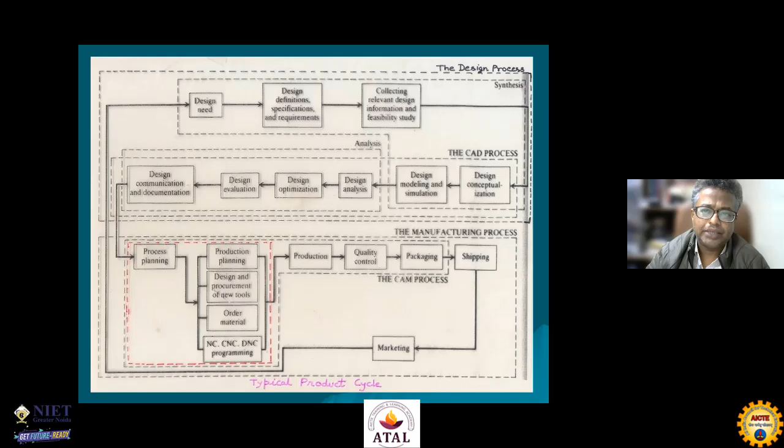So it was known as rapid prototyping because in this slide you can see this design process. It's a typical product design cycle. There are a variety of steps, starting from design need, and then you actually do the design of a product, do the analysis, do the optimization, and then finally once your design is optimized, you go for the evaluation of the design.

Evaluation of the design means you have to make your design and test it, because before really testing the design you cannot go for the production. So this particular step, design evaluation, is a very critical step.

Why is it a critical step? Because your product is new, the geometry may be complex, the materials may be complex, they may be stringent materials. So making the components and making the complete product may take a lot of time because there's no previous expertise available.

After that, once your design testing is successful, then you go for blueprint making of the design, that is the design documentation. And after that, before starting production, we go for planning of the production, that is process planning, production planning, design and procurement of new tools, ordering new material.

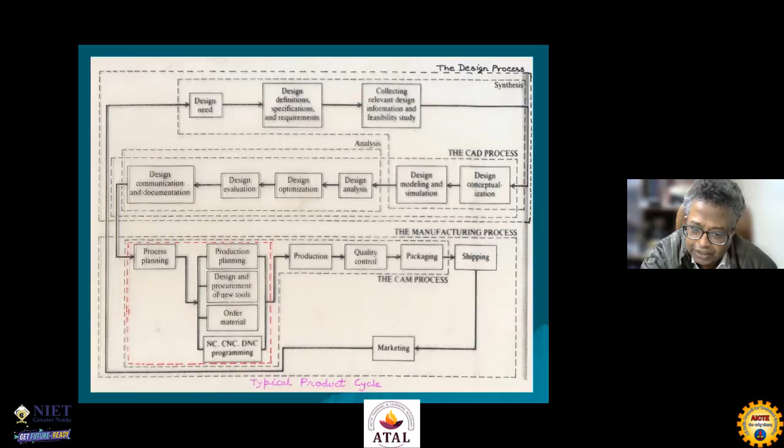So once the product is in the market, you again get feedback from your customers and you can modify your design needs. That's how this design process is a continuous process. It never ends, and the typical product design cycle has been shown in this particular figure.

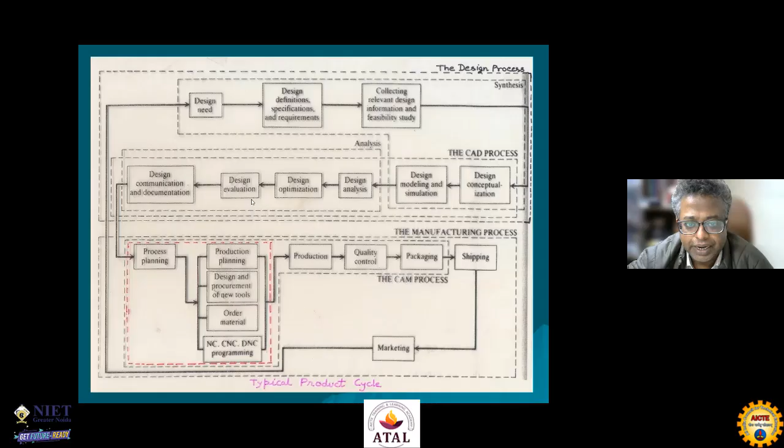So in the beginning, as I indicated, this prototyping used to be the product design function, and the focus or emphasis was on this design evaluation. This prototyping is nothing but making first few replicas or models of a particular product design, and it helps in conceptualization of a design before the start of full production. A prototype is usually fabricated and tested.

Earlier what people used to do was a long time taking activity. That's a bottleneck actually, because the entire activity used to be in the hands of people, and they are craftsmen basically, skilled craftsmen or skilled engineers, or diploma holders, and they used to do this activity. Because they were less in number, they used to be in high demand, and this activity used to take a long time.

So that's why people tried that, okay, why not develop prototypes, and we should try to do soft prototyping. Instead of actually doing the prototyping, we can try to test the component or the product virtually. That is said to be soft prototyping. So the model can be stressed in a virtual environment and simulated. That was a good activity, but it was not so good because there were many assumptions involved when you are actually solving a problem using software.

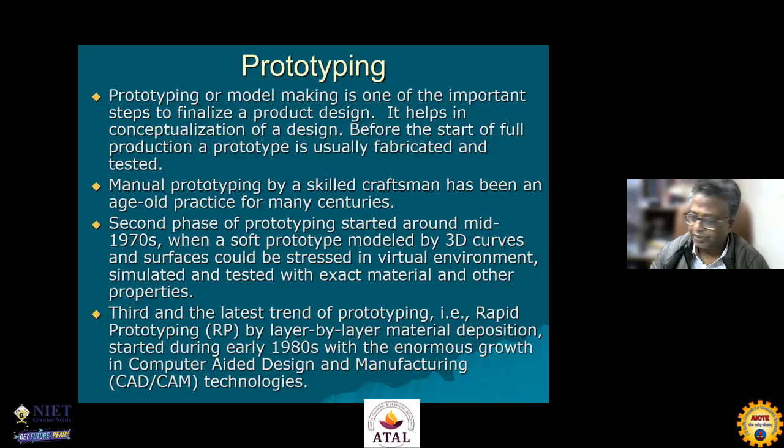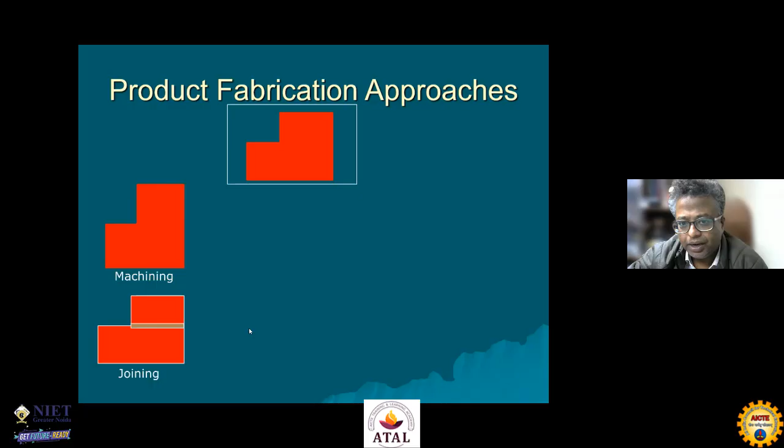Now let me explain the principle. Suppose you want to make a product like this. If you want to make a product like this, you are definitely going to do machining, that may be one approach. The second approach may be that you can join, and the third approach may be that you can take a bulk of material and deform it.

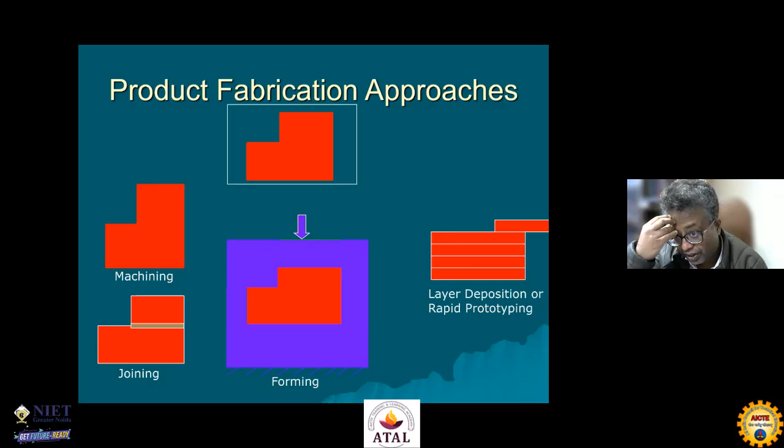But in rapid prototyping, what do we do? It is a bottom up approach. Bottom up approach means we try to deposit material layer by layer from bottom to the top, and we actually make the component. So this is the concept of prototyping.

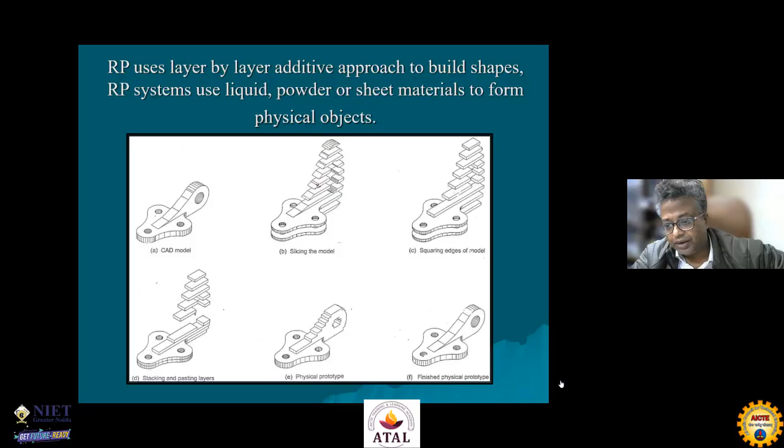So in order to make this more practical and give a better idea, the idea is that we start with CAD modeling. Whatever you want to make, whatever you want to produce, the first thing would be that you will make a model of it, correct? So you'll make a CAD model of it, and then you will slice the model, and after slicing the model, suppose you cut these kind of layers.

Suppose you take some thick paper or maybe a sheet, cut it like this, and stack these layers one over another. So basically you're going to get a physical prototype like this. If you compare the two, you'll find that the surfaces are not matching, correct? There's a stair-stepping effect because of the finite layer thickness.

Here you can have a look that the geometry of this hole is also not matching. This geometry is also not matching. So to go from here to here, some secondary operations will be needed.

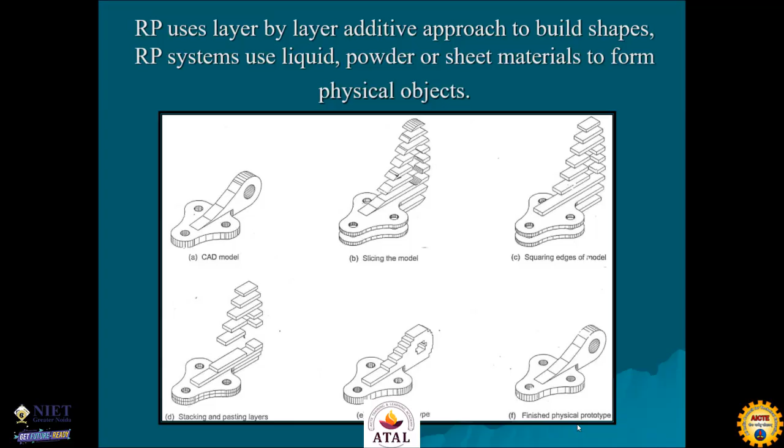Okay. So the RP process chain or 3D printing process chain: we start with the CAD modeling, and before slicing there's one more step involved, that you have to save your component as an STL file. Then you're slicing from bottom to the top, and once you slice, this sliced information, which is in the form of polygons, you're going to use as an input to the 3D printer.

There will be some more software in between based on the 3D printing technology. The generation of laser scanning paths or material deposition paths will also be done by this 3D printer. Once you get the component out of the 3D printer, you can post-process it, finish it, and test the prototype. That will be the final, or if there are drawbacks, you'll go and correct it once again.

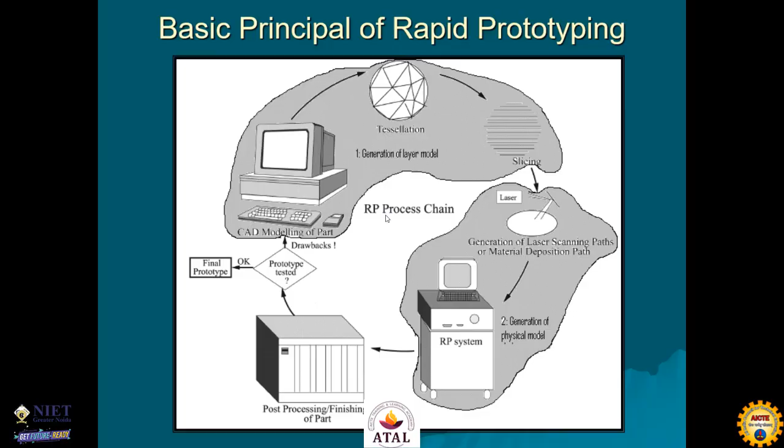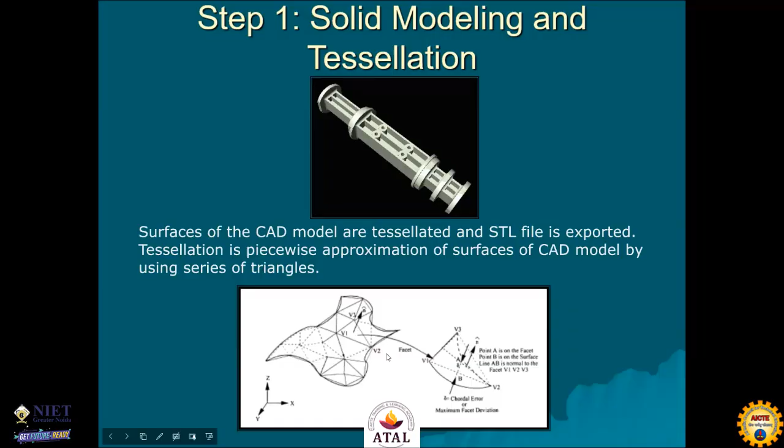So what we see is that you can have solid modeling and tessellation. Suppose you want to make this component. This is called an STL file, correct? You are going to see this STL file like this. That is, if this is a free-form surface, you're approximating this surface using small triangles. So this is what the STL file is.

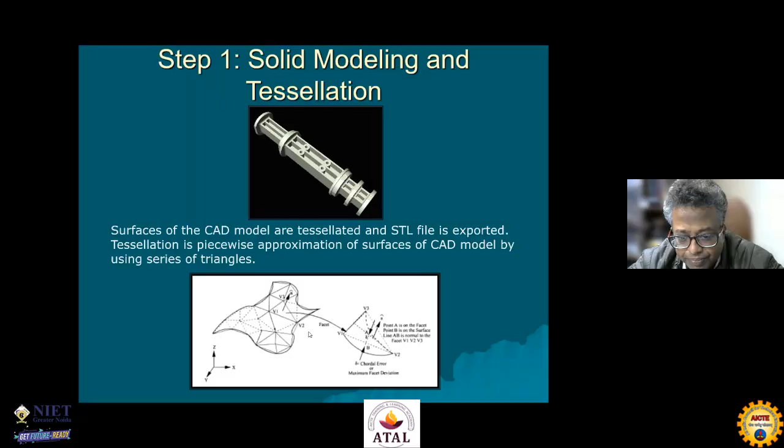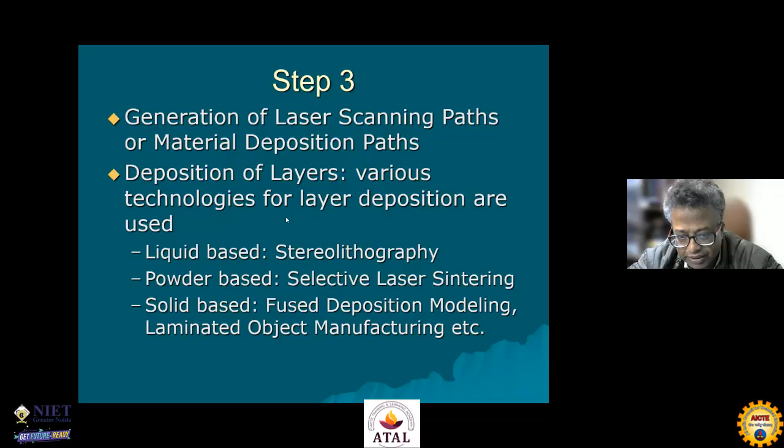As for the various technologies, there are liquid-based systems, powder-based systems, and solid-based systems. I'll describe these in my forthcoming slides. The last step is post-processing, which includes post-curing in certain processes, then you have to remove the support structure and finish by sanding, polishing or painting, in order to improve the surface quality of these components.

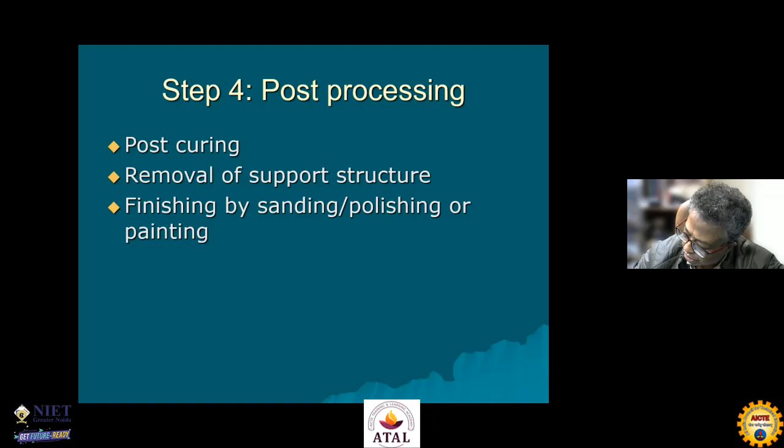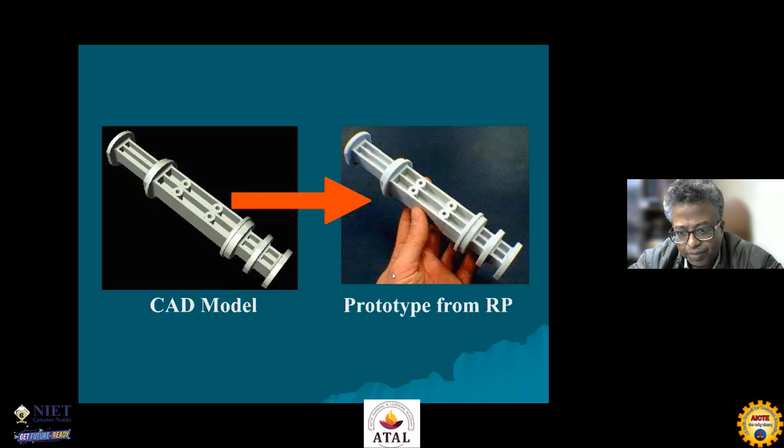Okay. So what we see is that in a very short span of time, maybe a few hours, you develop your CAD model and have the actual prototype in the hands of the person.

Then the various data sets which can be used in 3D printing. Obviously you can use 3D CAD, convert it to an STL file, and the STL file can be used to drive the 3D printer. Another is that you have a 2D drawing, convert it to 3D CAD and STL, and drive your 3D printer.

The next may be point cloud data, correct? If an old machine component is available and you don't have a drawing for it, you can have it scanned using a reverse engineering scanner and get point cloud data. You process this point cloud data using reverse engineering software, construct a 3D CAD, get the STL file, and drive your 3D printer.

Sometimes, using some algorithms, we can take point cloud data, polygonize it and directly get an STL file. That is another approach we follow. The most important one, I'll say, is the use of MRI and CT scan data as input data.

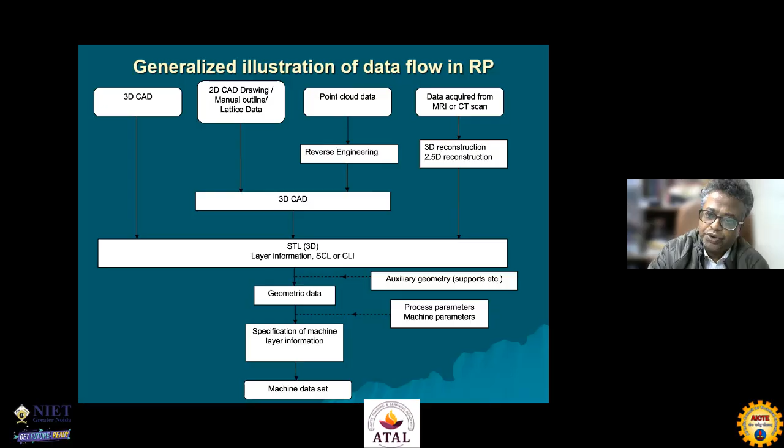So for biomedical applications, we use MRI data or CT scan data, and we try to reconstruct it using software like Simpleware or Mimics, and then we construct the STL file and go ahead and drive our 3D printer. So these are the four important data inputs which are used to drive the 3D printers in the case of additive manufacturing.

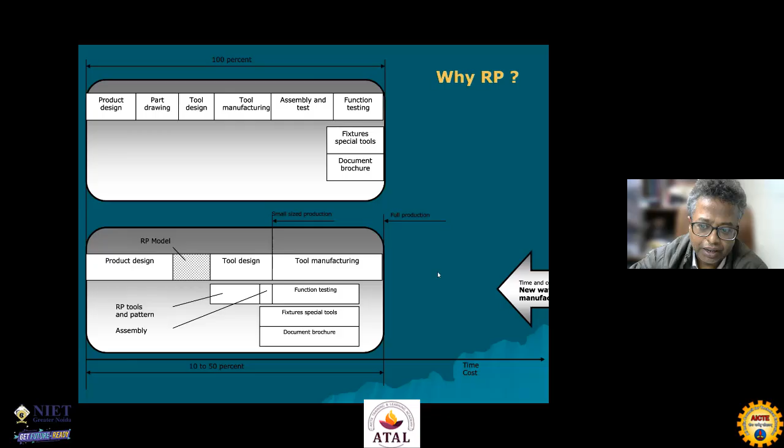So why was rapid prototyping important? I have already told you about introducing the RP product, RP prototype or RP model in your product design cycle for design testing. As has been shown, there are various steps. If you introduce this RP model, various projects have shown that the manufacturing lead time can be reduced by up to 90% in certain cases. So that is the advantage of using it as a product design tool.

But today, because many capabilities of 3D printing or additive manufacturing have increased, these processes are not only used as a product design tool, but also as a manufacturing tool. But definitely you cannot do mass manufacturing. You have to do it only for customized component manufacturing.

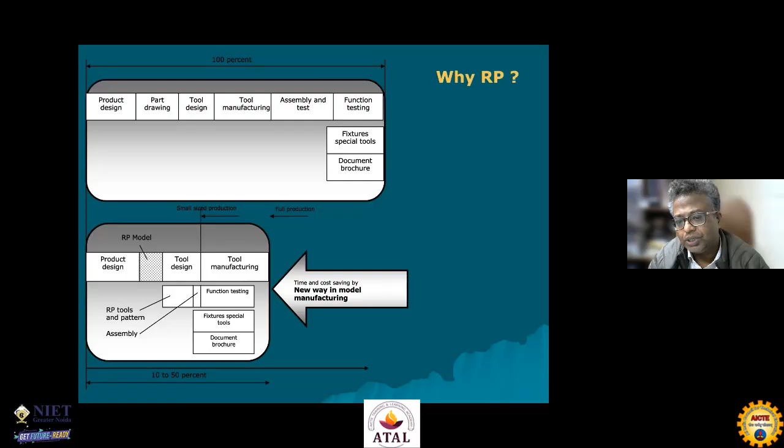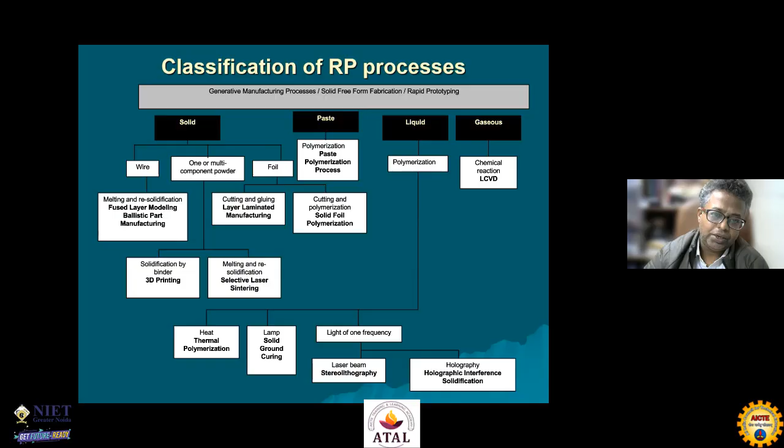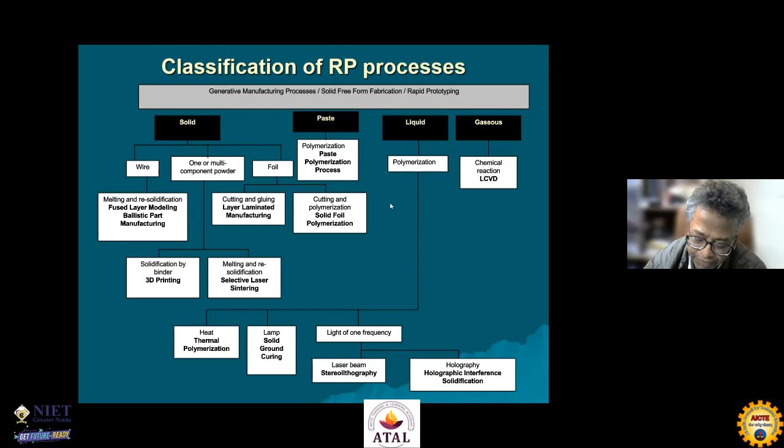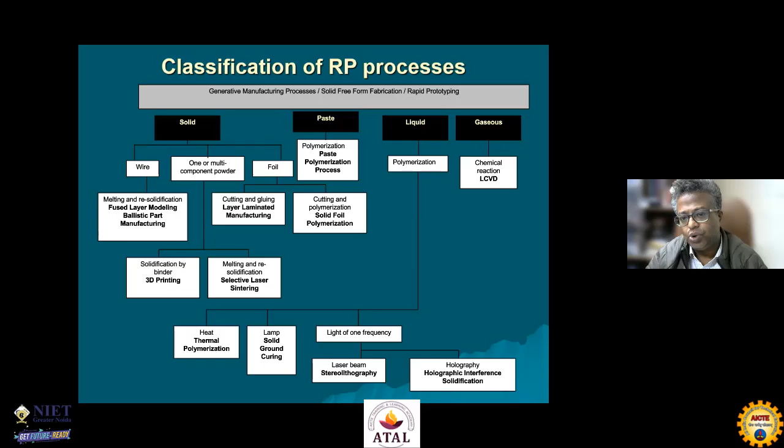So based on these principles, there are important AM processes which I am going to cover. There are many developments which have taken place from time to time, so I cannot cover everything, but the idea is to cover some important commercial processes which are a little older and popular, with good capabilities. One such process is called stereolithography.

My student will show you the stereolithography process as a live system from the lab after my lecture is over. So after 10-15 minutes, you will see this live system in our lab. I think NIET also has this system, stereolithography. Someone has this system at the Noida site.

I don't know. So here basically photopolymeric photosensitive resin is used and pumped above this platform, then the laser comes from the top, this movable mirror is moved, and the laser deflects the spot on the resin surface. Wherever this spot goes, there is photopolymerization, and that's how you are able to cure the material. So you get one layer, then the platform moves down, you pour more material, and you keep doing it from bottom to top. You also have to create a support structure if there's any overhanging feature present.

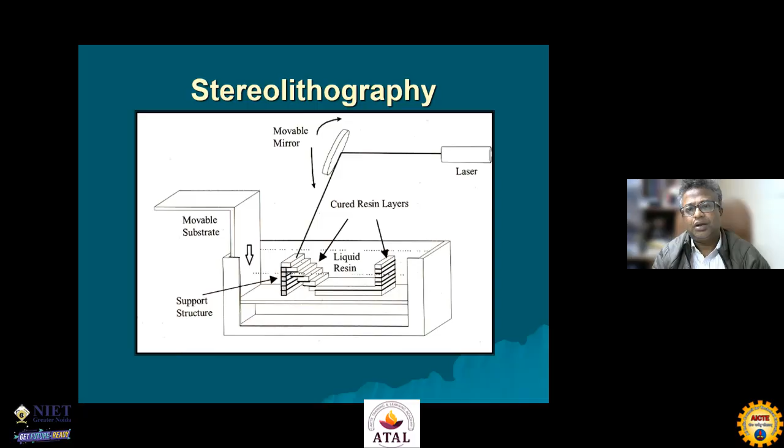Then in selective laser sintering or melting process, basically it is a powder bed fusion process. So here what do we have? We have this platform on which we are spreading the powder layer by layer, and the laser comes from the top, and there's a mirror, a galvano mirror, which is scanning the area which you want to sinter. So basically there's a fusion between the particles, and you're able to make these particles a solid lump.

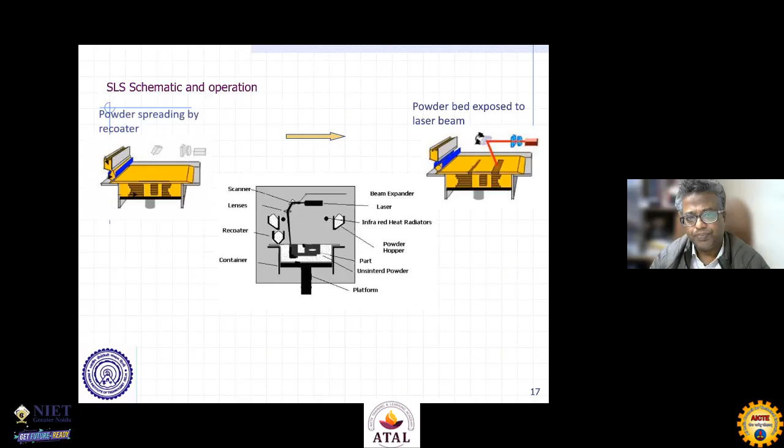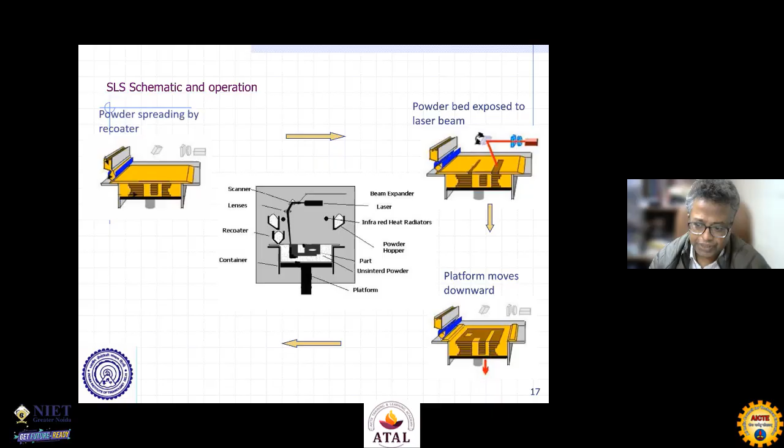So from this slide, it will become more clear that this is how there's a recoating of the layer, and then there's a powder bed exposed to the laser beam. So this brown color shows that this material has been sintered, and then the platform moves down, and you again recoat the layer. So that's how the process cycle is there.

So here one more important point is that this whole thing is done in an enclosed chamber, and the chamber temperature is maintained a few degrees Celsius below the melting temperature of the material. So that is being maintained by these infrared heat radiators, correct? So this is done in order to avoid the curling of the layers. So the laser increases the temperature only by a few degrees Celsius in this process.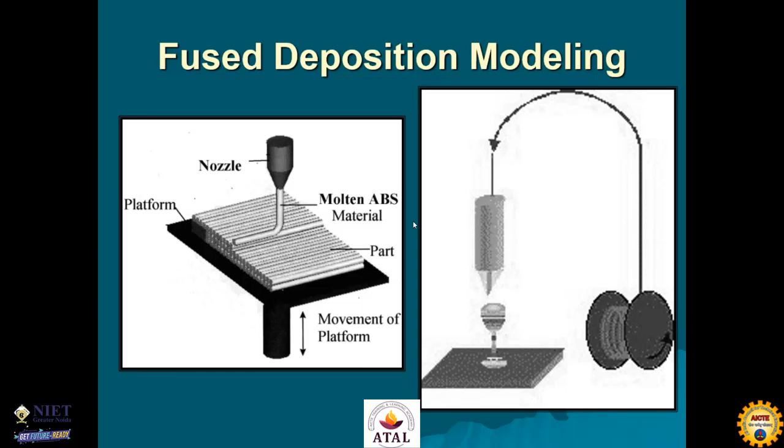So generally in a machine there are two nozzles, one is for the main material and the other is for the support material, and later on the support you have to remove. So a good demonstration about this process will also be done by my research scholar in the lab after this session.

Then laminated object manufacturing is another process. Here basically you are using a sheet material as the raw material. So the sheet gets stuck to this platform by the application of this heating roll, and then basically you are using the laser to cut the material, and then there's a layer by layer material deposition.

And so this cross hatched is actually waste material, and so the function of laser in this process is to cut the material, not to sinter the material. So the ring is actually required, and all other is waste material. So that's how you keep on doing. Then again it will proceed, and you will get another laminate on this. The heating roll will move, and again the laser will come. So you'll keep on building this component layer by layer.

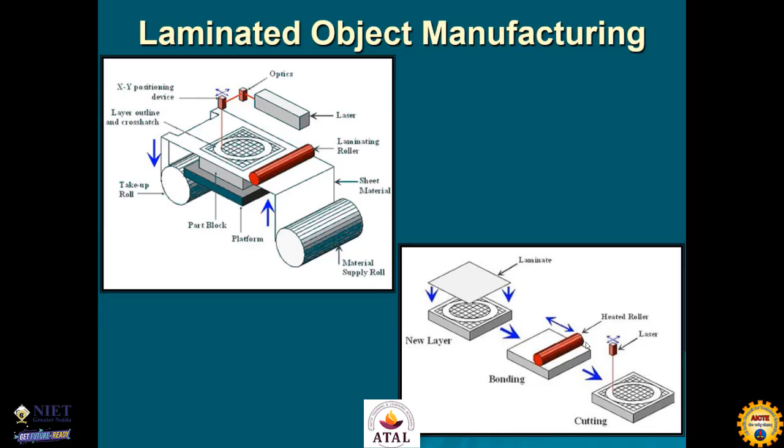So there are different variants of this process: LENS, direct metal deposition, directed energy deposition, LMD, laser metal deposition. All these are its variants. Almost the principle is same, but controls may be different, specifications may be different. So the characteristics of the component are definitely going to be different. So that's how we are able to do this LENS. Even in LENS, they have a 5-axis table, so different kinds of depositions you can do.

Then basically we also have electron beam additive manufacturing. We have wire arc additive manufacturing, WAAM. So these are the new processes which have come in the field of metal manufacturing. So you can just have a look on this. That is additive manufacturing.

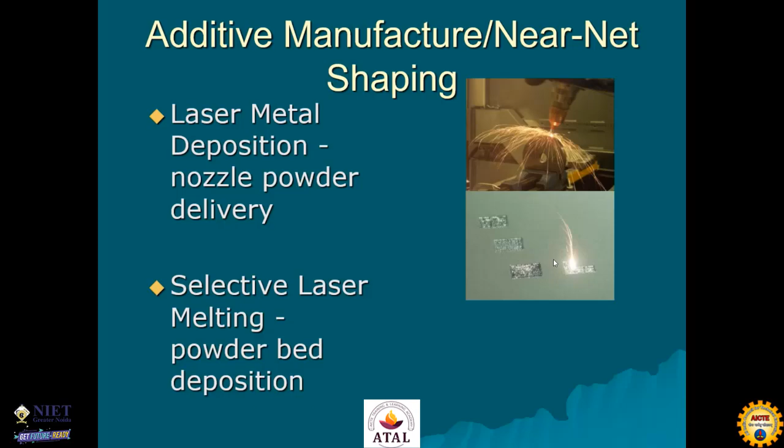So let me now talk about the applications. That is the last part of my presentation. So you can do CAD model verification, visualization of objects, proof of concept.

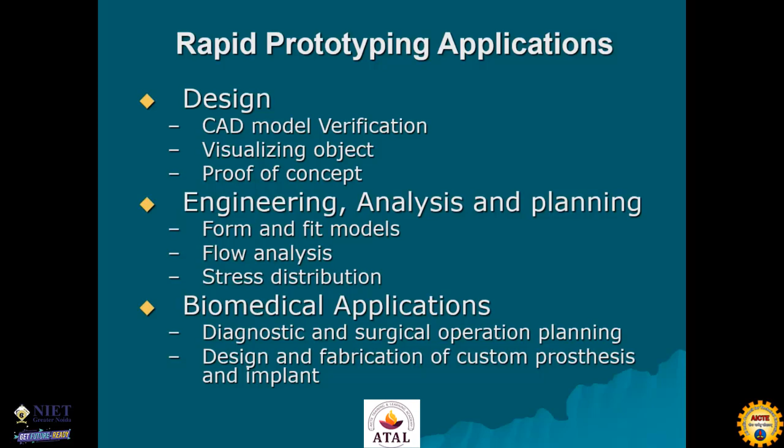Then you can do engineering analysis and planning. There may be some biomedical applications, that is diagnostic and surgical operation planning, fabrication of implants, prosthesis. And then in manufacturing also there are a wide variety of applications, which includes die manufacturing, pattern manufacturing. Even you can have a wax kind of pattern so that you can produce different designs in gold, that is investment casting. So this gold jewelry which you see today, Tanishq jewelry, that is all done through this route.

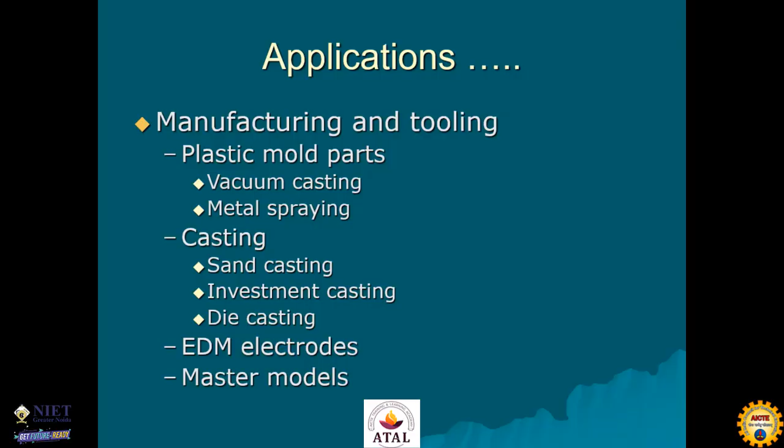So you make a model, you make a design basically using 3D printer, and then make an investment casting mold and pour the gold so that you get a cast jewelry. Then you have basically EDM electrode. So EDM, if you want to produce a typical die, the die geometry is known, so you have to make an EDM electrode for it. So the EDM electrode you can make by RP process or by AM process, and you use it for machining cavity.

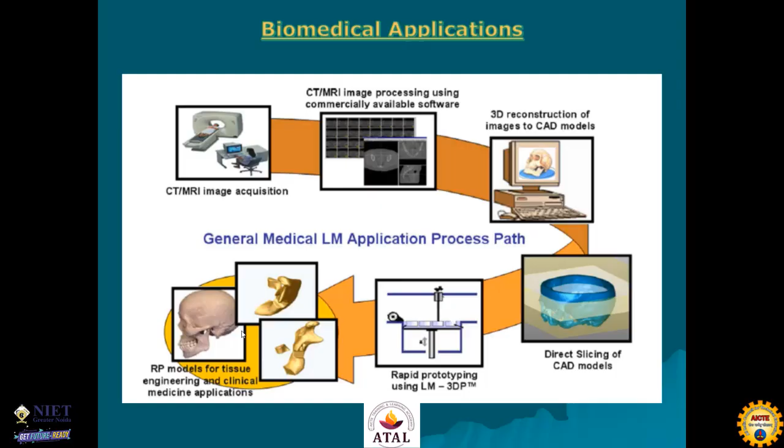So this is a slide which shows what is biomedical application. So you can have CT or MRI image acquisition, and you can have this kind of grayscale images. This is a layer by layer information. You can have a software and you can reconstruct this thing, and you can drive a 3D printer and you can get this thing. So basically some examples you can see, they themselves are well explained, so you can enjoy these pictures.

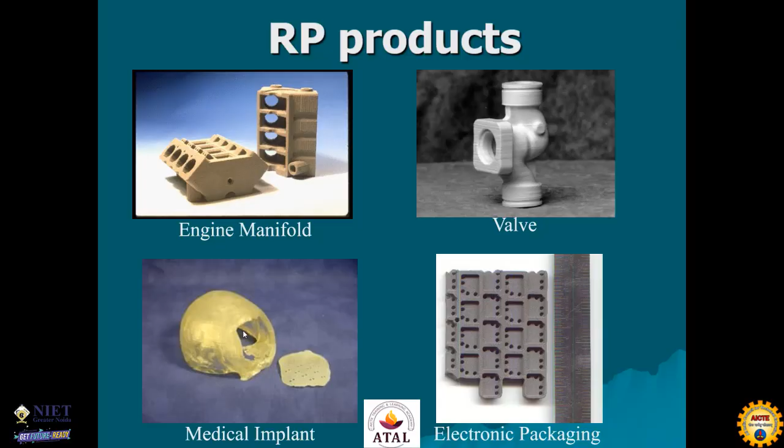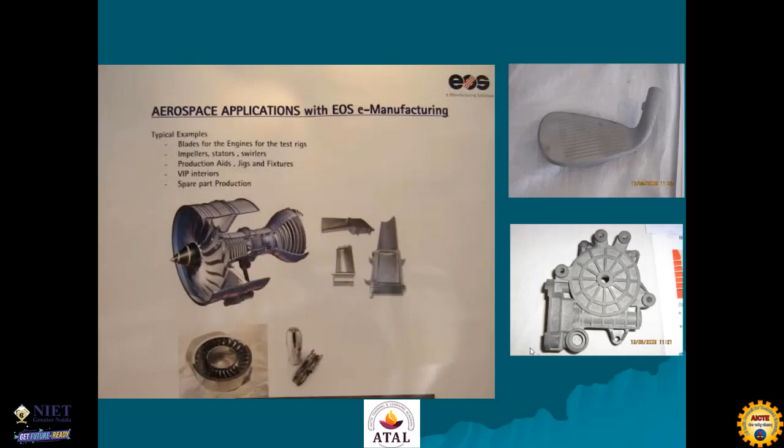This is an aerospace application that you can produce these titanium blades or repair titanium blades using LENS kind of process. So you can see these typical very difficult to manufacture components, correct? So they can be done by this thing. So there's no other alternative using which you can do these kinds of components. This is a typical die, correct?

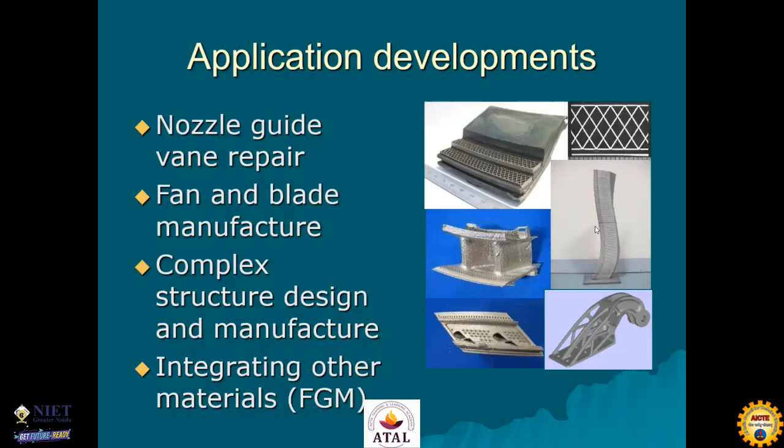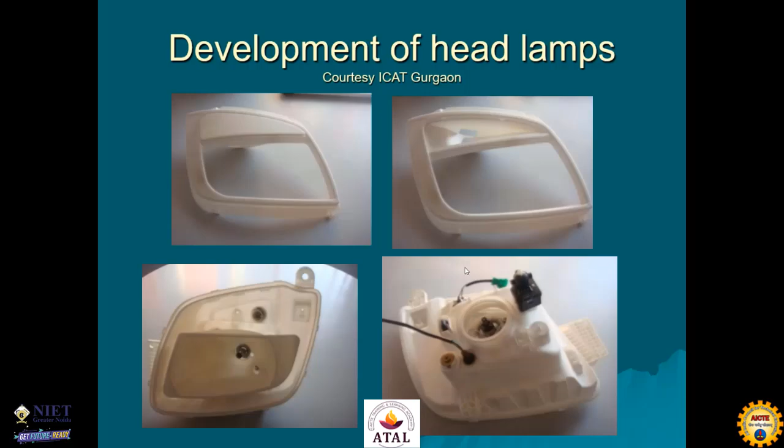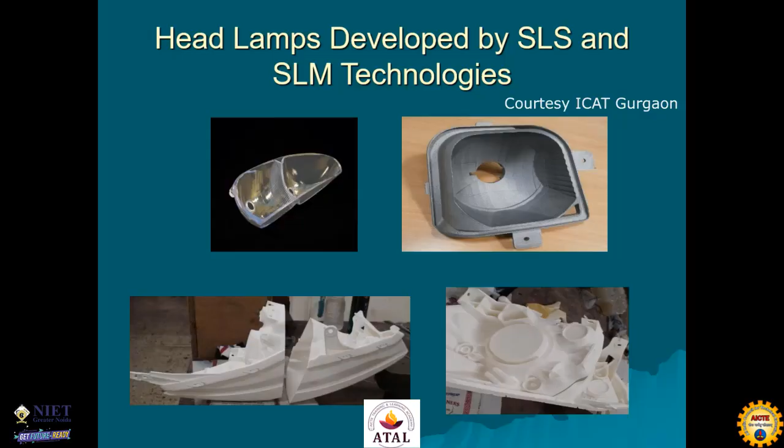Then this is a plastic SLS made headlamp, which is actually kept in this particular vehicle. So they are using this process as an additive manufacturing process. Then these plastic components can be spray painted in order to improve their surface quality and in order to improve their strength. So this is the finished and painted headlamp. Basically, these beautiful artifacts, if you try to see, they can also be produced using 3D printing kind of process.

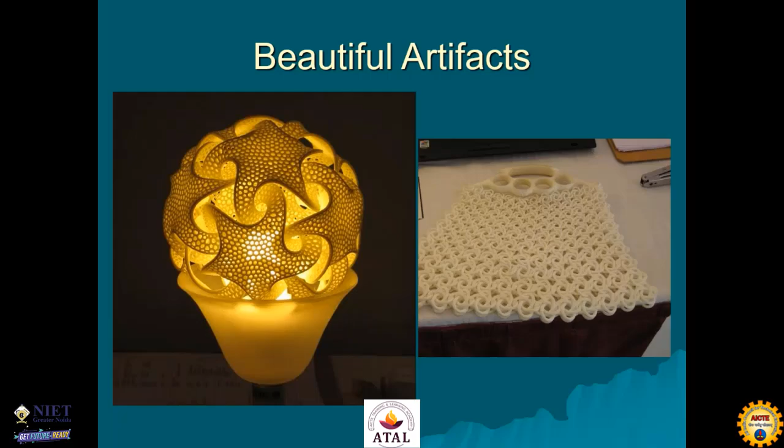Okay, so what is the next generation additive manufacturing? The next generation additive manufacturing is that we can have smart components. What are these smart components? These smart components are like you can have optical, electrical, structural sensors embedded in these components, and then basically they can be used to give some signals when they are under operation. So those kinds of smart components, they can be produced by 3D printing.

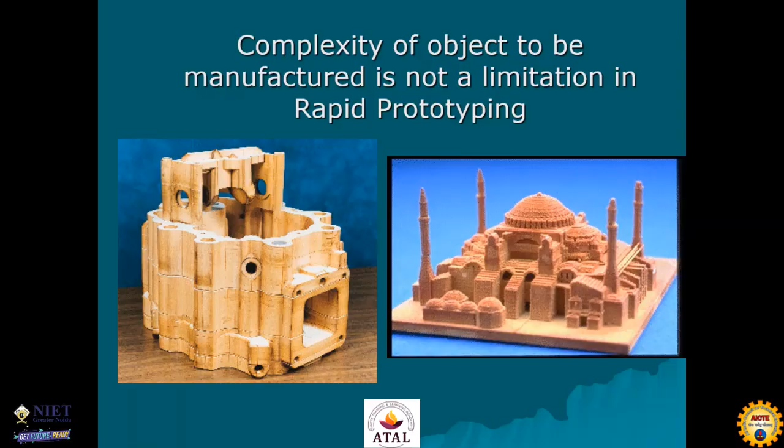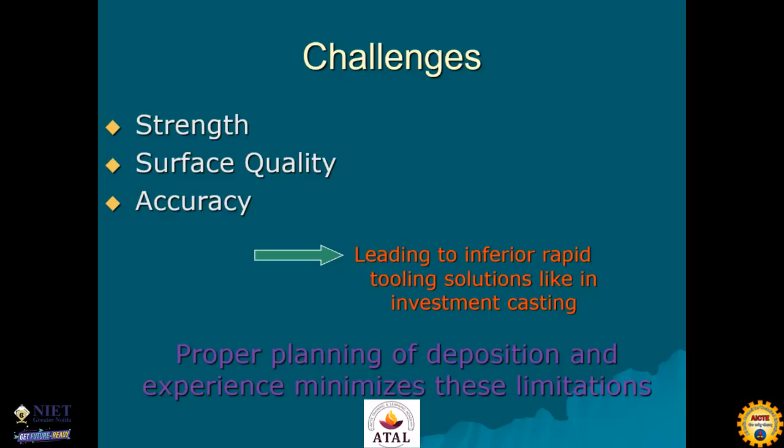So the complexity of object to be manufactured is not a limitation in rapid prototyping or 3D printing, correct? But still there are many challenges. They are related to strength is low, surface quality is not that good, accuracy is low. But if you do proper planning of deposition and experience keeps on adding, then it can minimize these limitations. So that's how you will see that these are quite potential processes. So I'll show you a few distinctive features of additive manufacturing.

Okay, so can you see another presentation now or not? I think you cannot. Sir, it is visible.

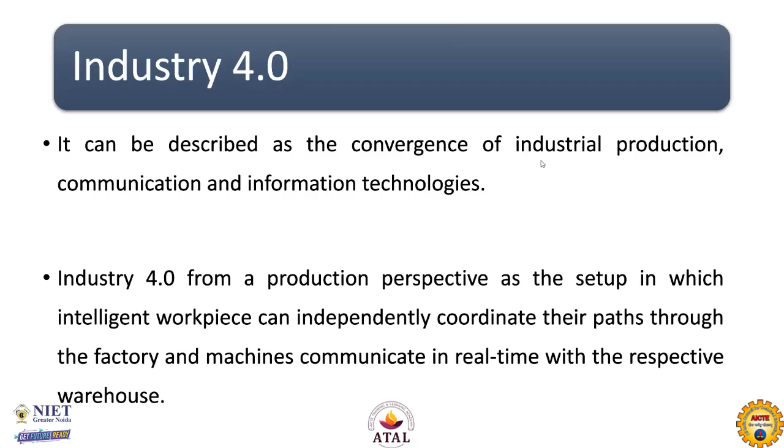What is this role of additive manufacturing in Industry 4.0? Yes, sir. Is it visible? Okay. Yes, sir. Okay, so what is Industry 4.0? It can be described as the convergence of industrial production, communication and information technologies. So please note that it is a convergence of production, communication and information technologies. Industry 4.0 has resulted in a paradigm shift from centrally controlled to decentralized production processes. Fine.

So additive manufacturing, what makes it important? What are the features of this additive manufacturing which make it important, so that you can see this? So basically it is the shape complexity, correct? So distinctive features of additive manufacturing, that is shape complexity.

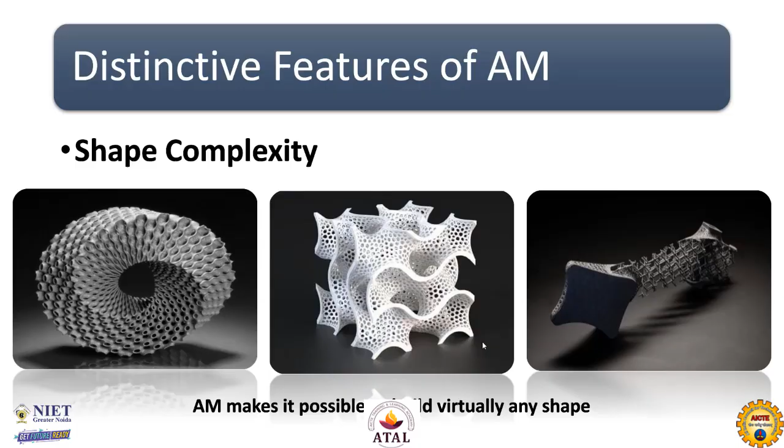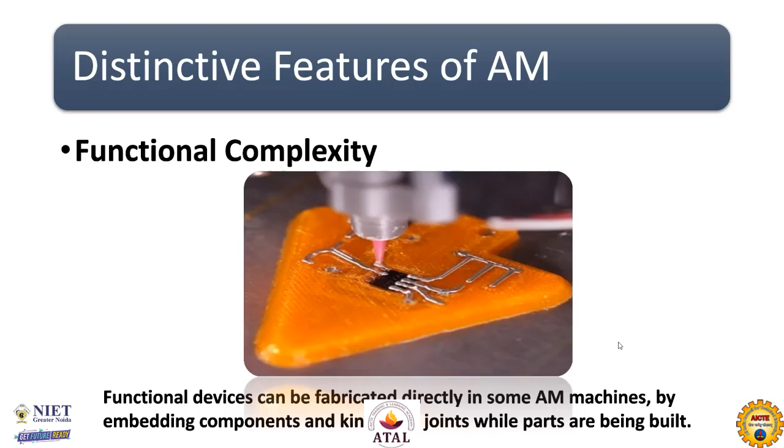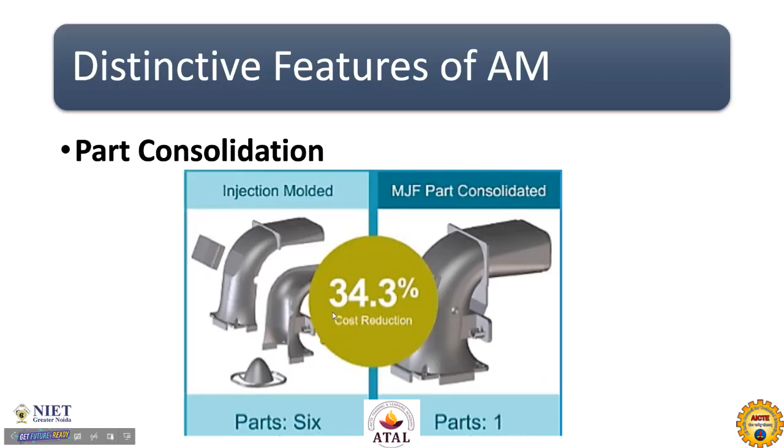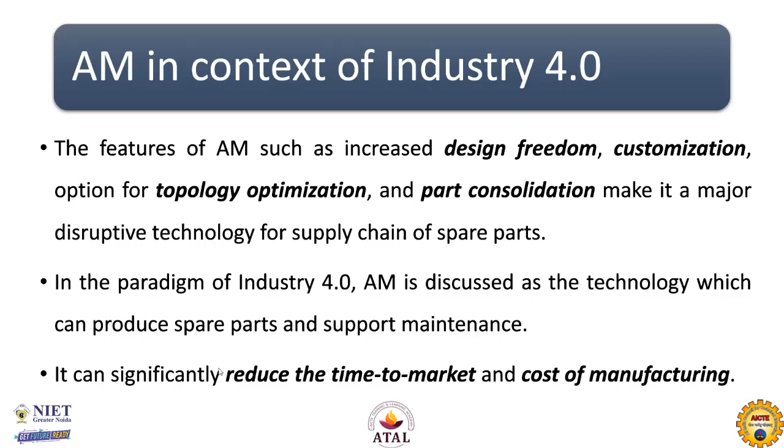So these 4 or 5 features of additive manufacturing, like design freedom, customization, topological optimization, part consolidation, make it a major disruptive technology for the supply chain of spare parts also. So basically they can significantly reduce the time to market and cost of manufacturing.

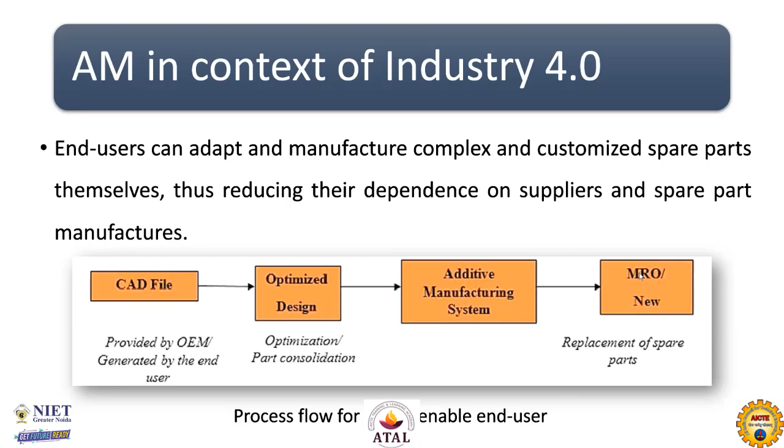So basically additive manufacturing in the context of Industry 4.0, if you want to see, then you can see that you can produce a CAD file with optimum design, you can do additive manufacturing, and you can use it for maintenance, repair and overhaul, or the replacement of new spares.

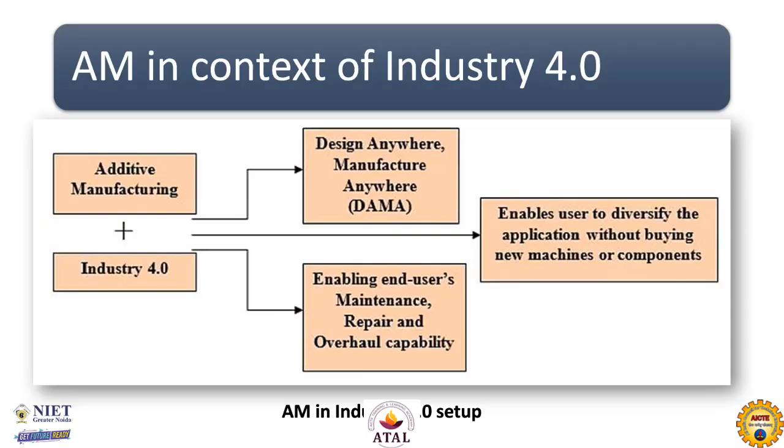So additive manufacturing in the environment of Industry 4.0, I must say, you can design anywhere and manufacture anywhere. And it enables end users for maintenance, repair and overhaul capability. So it enables users to diversify the application without buying new machines or components. So you might have heard that people want to send this 3D printer to space so that if there's any problem and there is a CAD model, they can print a component there itself and use it.

But there are various barriers of integration of AM in industry. So these barriers are like high investment cost, which includes material cost, machine cost, and additional design cost, etc. Organizational psychology has to be changed, correct? Automation, one has to have faith in automation, working safety, quality policies. And there's an unpredictable risk also.

And then there's a lack of know-how. You all know that there's a lot of lack of know-how. So reliable and reproducible material performance designed for AM and knowledge of this AM technology, that is something which is lacking, which is a barrier.

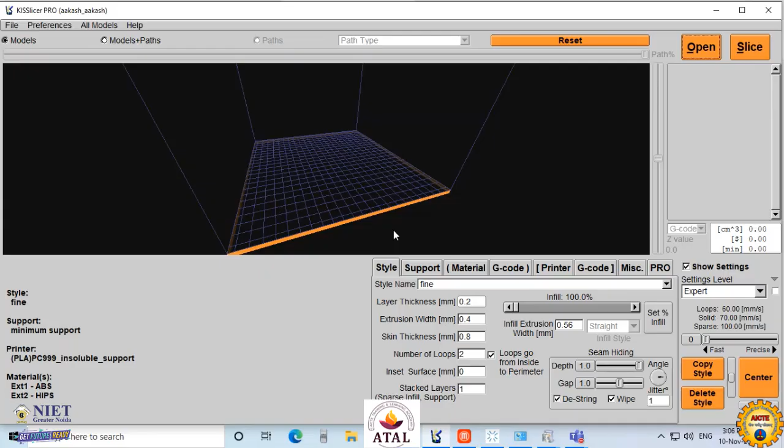After getting the STL file, you can open it in this software. On the right side you can see the STL file. I am opening this STL file. The name of this software used for FDM purpose is KISSlicer, the specific software for FDM based systems which we have in our lab.

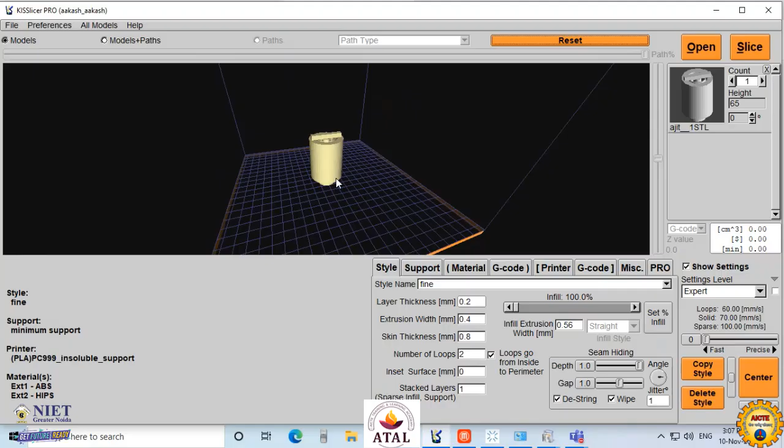This is a part, and this figure is showing the bed of the printer, with bed size 230mm x 230mm x 230mm. This is the part which has been placed in the form of an STL file on that bed.

After that, we will apply some desired conditions which we require for our part. On screen you can see the number of tabs: style, support, material, G-code, printer, and other. We will first select the style tab. In this tab, we choose the profile we want to work with. I am selecting the fine profile.

In this you will see layer thickness, extrusion width, and skin thickness given. For this kind of printer available in our lab, extrusion width and skin thickness are kept constant by the company for that particular printer, but these parameters can be varied.

But here is the layer thickness. Layer thickness is the main parameter which will decide the complexity, or you can say compactness, of the part after printing. It can be varied to different dimensions depending upon the nozzle diameter. Generally, 70 to 80% of layer thickness is maintained with respect to the nozzle diameter. For example, if we have a 0.4mm nozzle diameter, then we select 70% or 80% of that. In our FDM system, we have nozzle diameter 0.3mm, that's why we have selected layer thickness 0.2.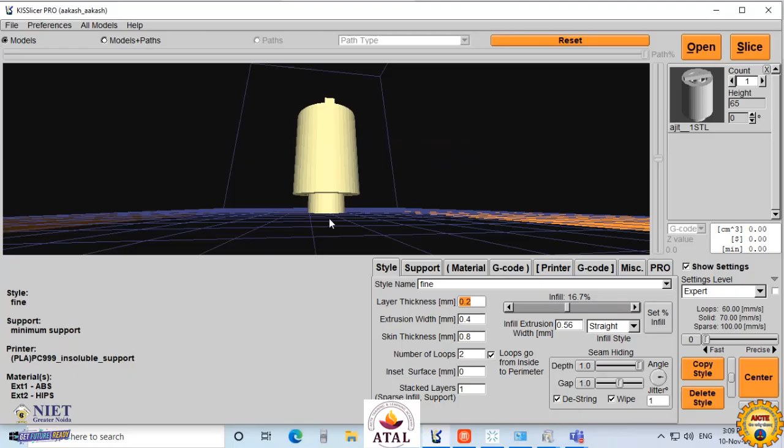After that, infill is selected. Here it is 16.7%. This also depends upon your requirement. Infill is the filling of the part which is solid. You will see this is a solid part. Infill is the interstitial material which gets filled in this area. So this depends upon your requirement. We can change it from 0 to 100%.

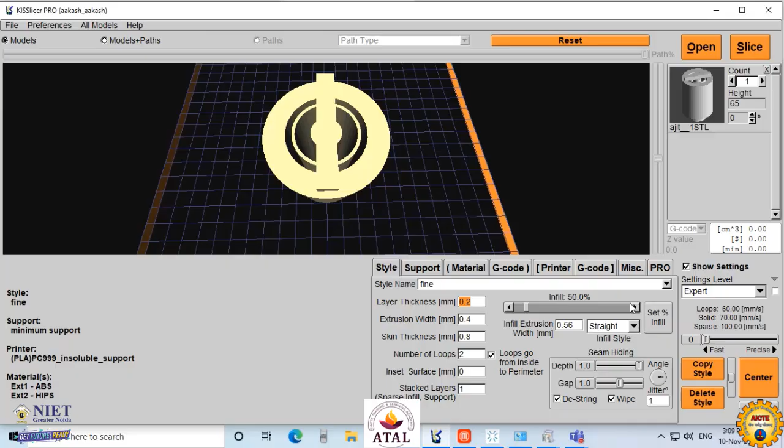After that, support material. If we want to make any overhang part or cavity, you can see this portion is the overhanging portion. So for fabricating this part, we need to supply support material over here. Here we will select the amount of support for fabrication of this overhanging part. This depends on your requirement, whether you want rough, medium, dense or fine. You will see the support intensity changing here: rough, medium, dense, and fine as we move the slider.

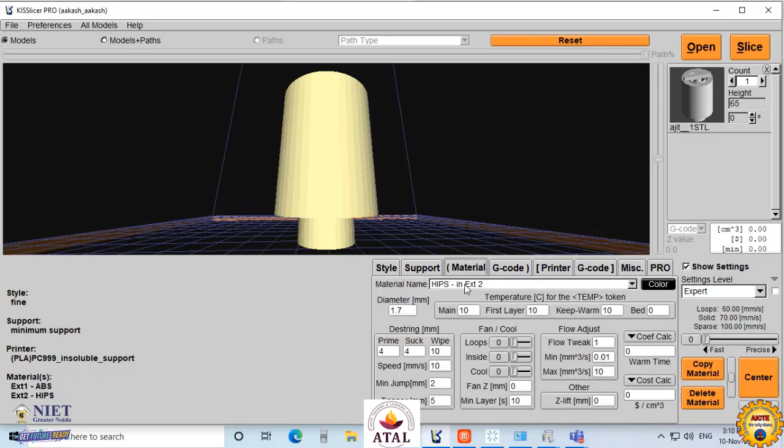After that these parameters are selected: material, which is already fixed in FDM. ABS for the first extruder and HIPS for the second extruder. This is a two-extruder FDM printer, in which extruder one has the main material ABS, acrylonitrile butadiene styrene, and extruder two has the support material, which is HIPS, high impact polystyrene.

Remaining parameters on screen are fixed by the company for this particular printer. After that, printer parameters are selected. You can see here the bed size is given. This gives the amount, or you can say volume...

Sir, your voice is missing, part, sir. Yeah, hello? Hello, yes sir, now it's audible. Oh, this is the bed size. This bed size decides the amount of volume which we can fabricate on that printer, or you can say size of the part.

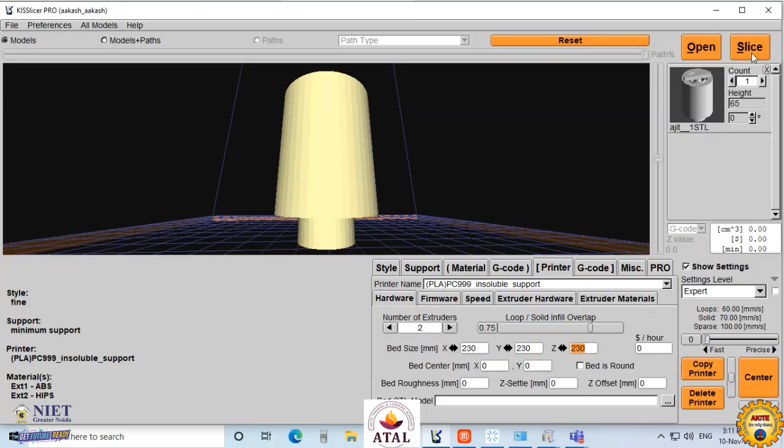After deciding all these parameters, we will go to slice. I'm pressing the slice button. You will see the slicing will be done. Now slicing is done. Now I will save the part, which will be saved in the form of G-code. You can see here.

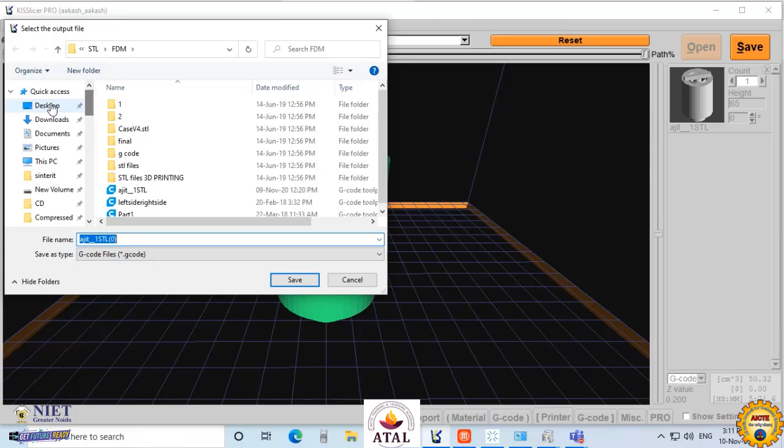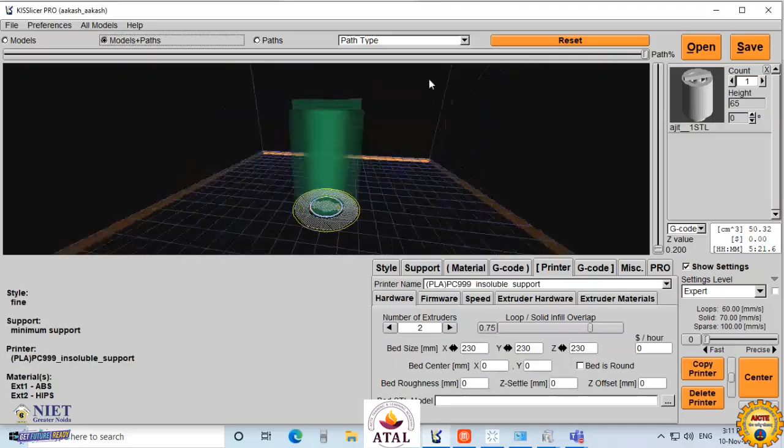This has got sliced. Now if you want to see how our part will be printed, here is a module given to check how the layer by layer movement will occur in the printer. You can see I will move the slide bar from here, and you will see how the printer will work layer by layer. This is the first layer, second, third, fourth, fifth, sixth, and multiple layers. However much we have, all will get printed by the printer.

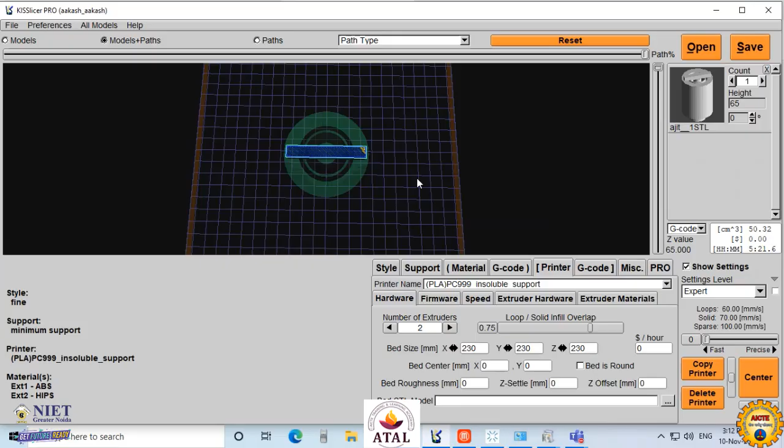Okay, is it okay for all? Yes, sir. This is the software which does the slicing for the FDM based, fused deposition modeling based printer.

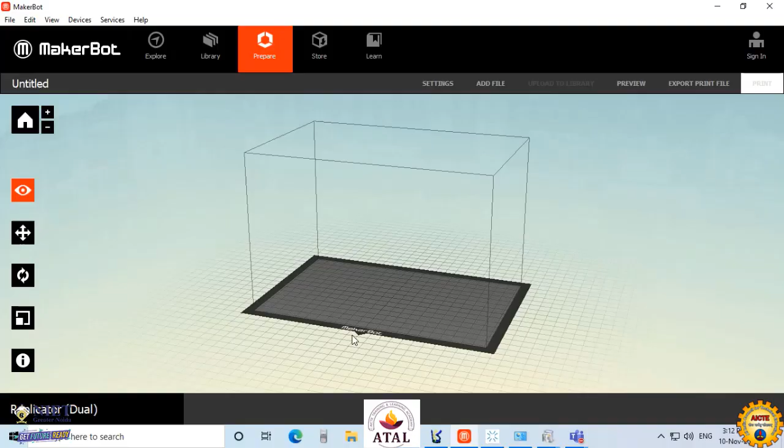Second one, this is also an FDM based printer which is being used for the upgraded FDM. In the previous one we have the base model, but this software is used for the advanced version of FDM. The basic principle is the same. Here also we do similar settings like the previous one.

Right extruder settings, left extruder setting. We have to give the speed, layer thickness, filament diameter which we are using for that printing. Here is also extrusion speed. Generally, for an FDM based printer, we use printing speed approximately 60 to 100 per second. Please keep in mind all these things. For FDM based systems, we cannot increase the speed above 100.

Also, we have a system for providing support. According to that, we have to set the parameters here. For example, this is our part. After doing all these things, we will generate the G code or any other code which can be easily read by the printer.

You can see here, the .x3g format will be generated. This is the advanced version of the G code which is widely used for the latest FDM based system. So this part's .x3g format will be saved and imported to the printer in which we have to print our part.

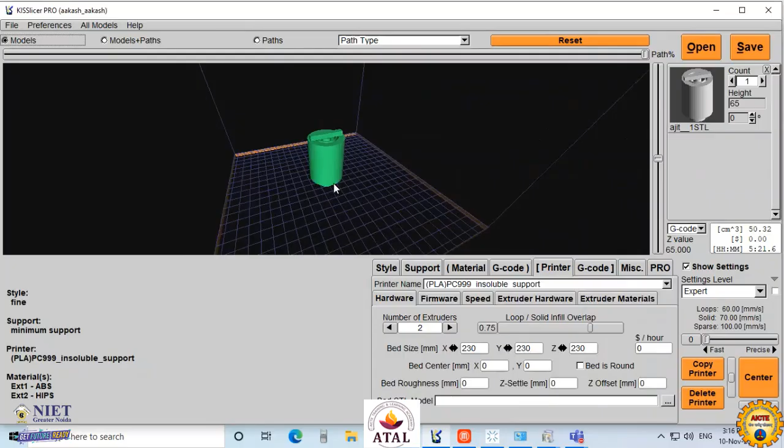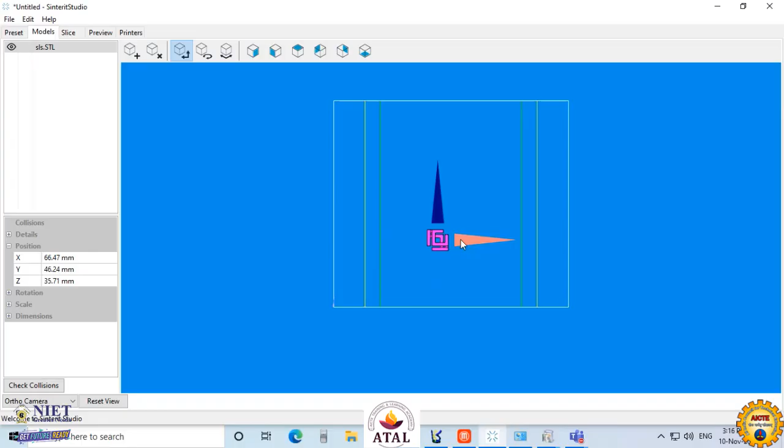In SLS based system, one thing I want to say is that, as in the previous one, you have seen the part directly lying on the bed. But in selective laser system or powder based system, the part is not directly lying on the bed. We have to maintain it at a distance from the bed, because at the lower side we have to provide some powder to make a support for the first layer. Otherwise, the first layer will not get printed, because for initiation of the printing, powder material should be present there. So we have to keep our part above the bed in this powder based system.

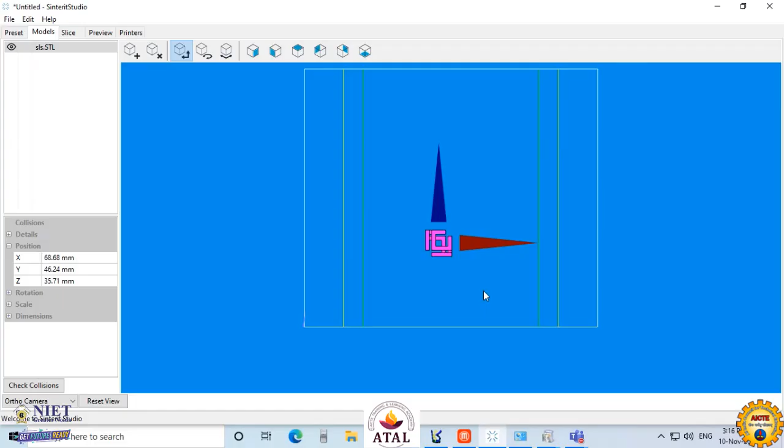After doing all these settings, we have set the layer height and all the machining parameters here, model setting. We will do the slice here. After slicing, in this system, S code will be generated, which is similar to the G code we studied earlier.

Now, after slicing, the software will give the parameters in which we can print our part. You will see, one thing I want to say here, that the total powder needed is 3.03 liters. You will be surprised that the quantity of powder is in liters, but this is true.

In this system, the powder is measured in the form of liters, and the unit of measurement of this powder or scale is already given with the equipment, provided by the company with the printer. Total powder needed is 3.03, but thereafter we need to add some extra fresh powder. This fresh powder is required because some amount of used powder can be applied for the next coating, but a little amount of fresh powder is also required for the parts to be printed.